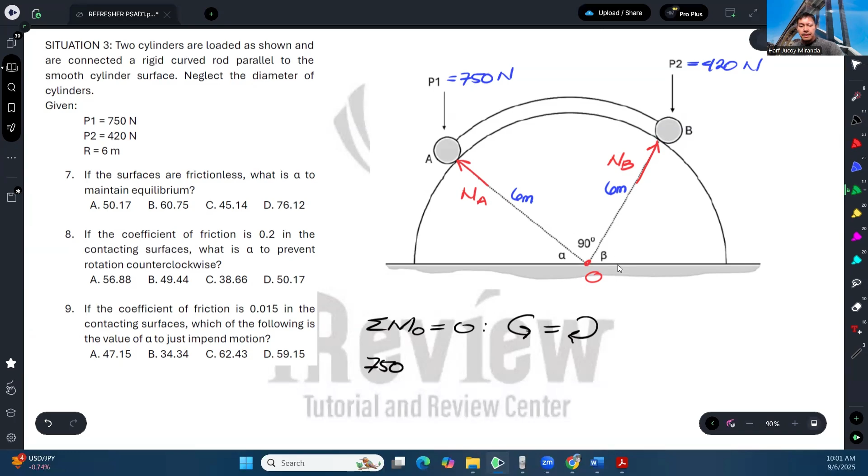If you consider this triangle, this is actually 6 cosine alpha. So that is its moment arm, and its rotation is counterclockwise, which is what it counters here.

Then, NA will no longer have a rotation about point O. That's why I strategically chose point O as the point of rotation, since NA will pass through that center, so it has no moment when we take moments there. The same applies to NB.

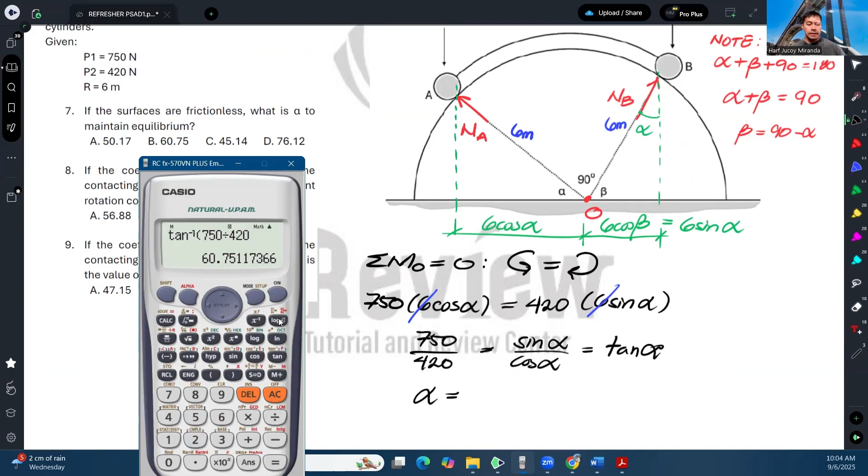So how do we do it? I'll divide this by 420, then move the cosine to the other side, giving us tangent. To solve for alpha, we just take the arctangent. Arctangent of 750 over 420 gives us 60.75 degrees.

That is already our answer for number 7.

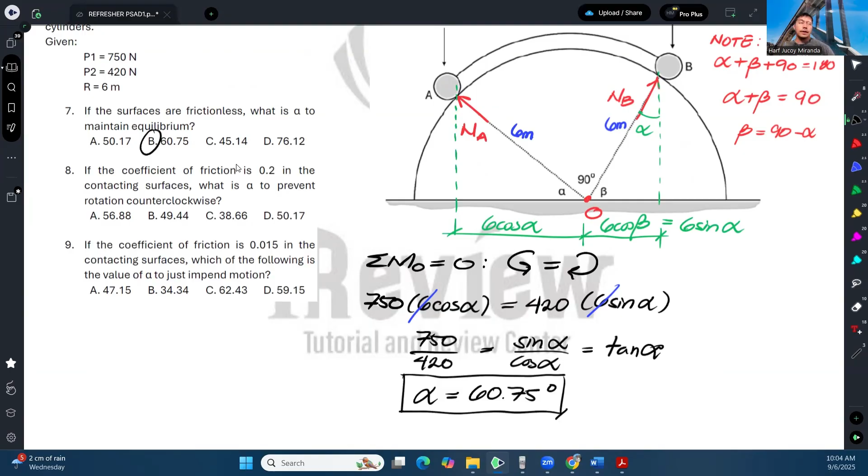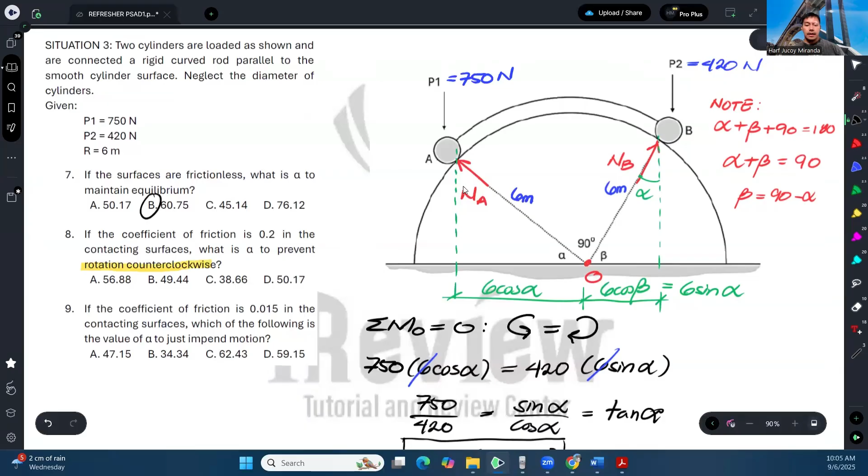For number 8, if the coefficient of friction is 0.2 at the contacting surfaces, what is alpha to prevent counterclockwise rotation? Now there's friction involved, so I'll repeat the drawing, but this time considering friction. This is for number 8.

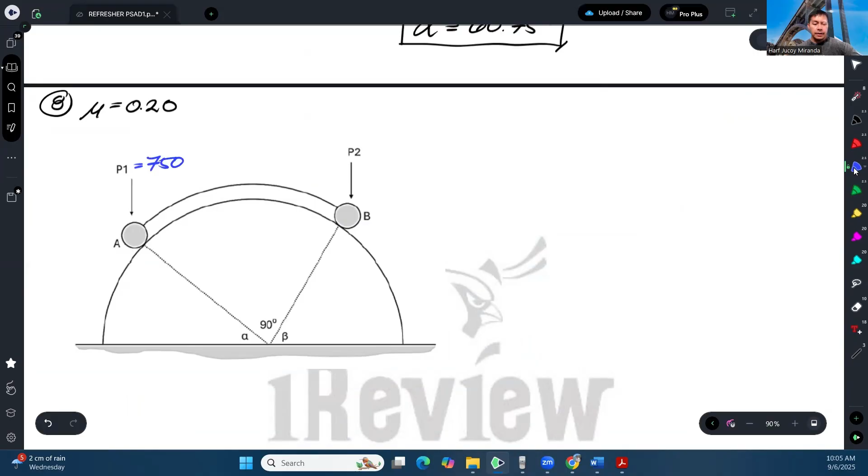For number 8, the coefficient of friction is 0.2. Now, when we draw the free body diagram again, we have 750 and 420.

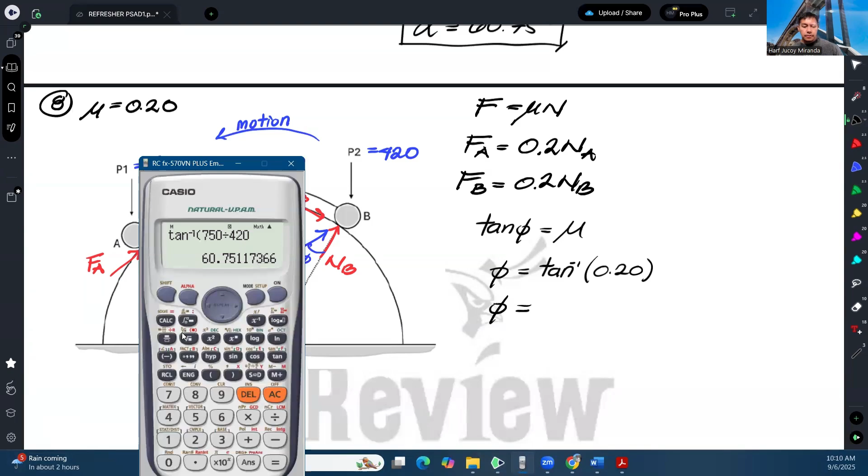So the next thing we'll do to solve for RA and RB is to combine them all together. Or you can apply summation of forces vertical and summation of forces horizontal - that works too. But to simplify, let's make a force triangle instead.

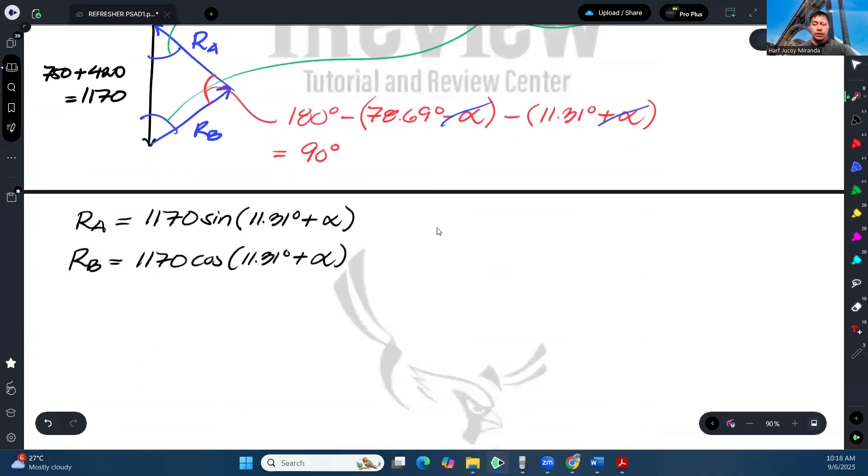Okay? So now let's proceed to taking summation of moment about point O. Assume ko na lang na counterclockwise is positive. Okay? So para lang malinaw, let me just redraw that ulit. So para hindi nakakalito, no?

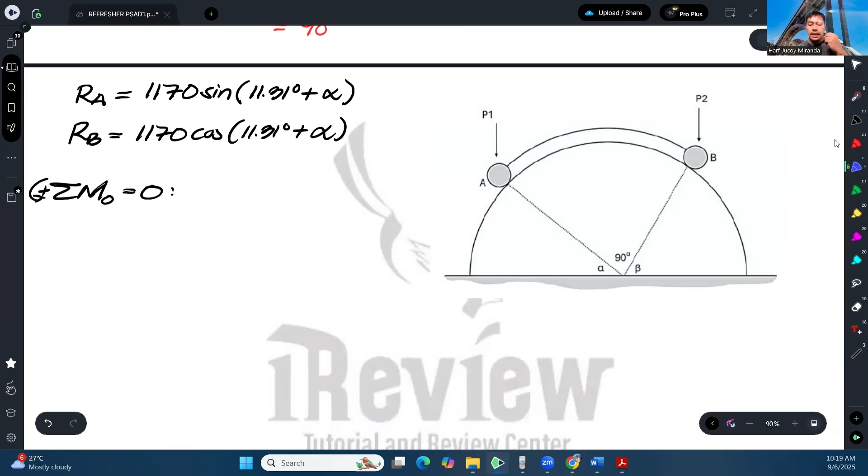Okay, so once again, we already determined that ito 750, this is 420. Tapos we already replace yung mga forces dito ng ganito na lang, RA. Tapos dito naman, ganito. RB, no? Tapos ito yung phi. So phi, okay? So ngayon, pag nag-moment tayo sa point O, unahin ko muna

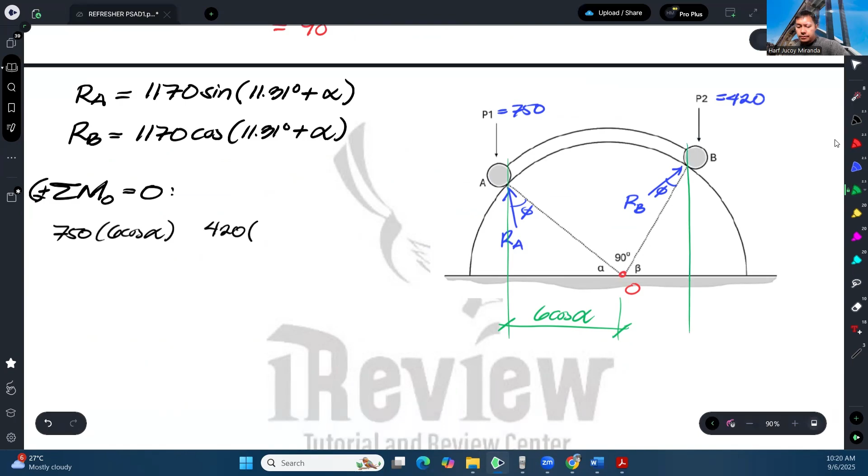yung 750 tsaka 420. So yung 750, ang magiging moment arm niya, kagaya lang kanina, ito, na 6 cosine alpha. Okay, counterclockwise. Tapos yung 420 naman, ang magiging moment arm niya, ito naman, which we already recognize to be 6 sine alpha. Tapos clockwise yan.

Tapos yung RA na to, kailangan natin i-component, di ba? So meron siyang X component or meron siyang component dito, tapos meron din siyang component dito. Bali ganito yung components niya, di ba? So yung component niya dito, wala nang moment yan. Kasi zero, dadaan lang siya doon sa point of rotation. Ang meron na lang siyang rotation is itong component na to.

Lipat ko dito ha, yung component na yun. And that component is RA sine of phi. Di ba? So ganun din dito sa B, meron siyang component. So yung component, ilipat natin dito. So ito yun. And that is RB, again, sine of phi. Okay? So yun lang yung iikot.

Now, again, yung component nila dito, walang moment sa O. Alright, so lagay natin. So unahin ko yung RA. So RA, sine of phi, which is 11.31, lagyan ko na, degrees. Ang magiging moment arm nito is yung radius mismo. So times 6. Tapos ang rotation na ipoproduce nito, clockwise, so negative.

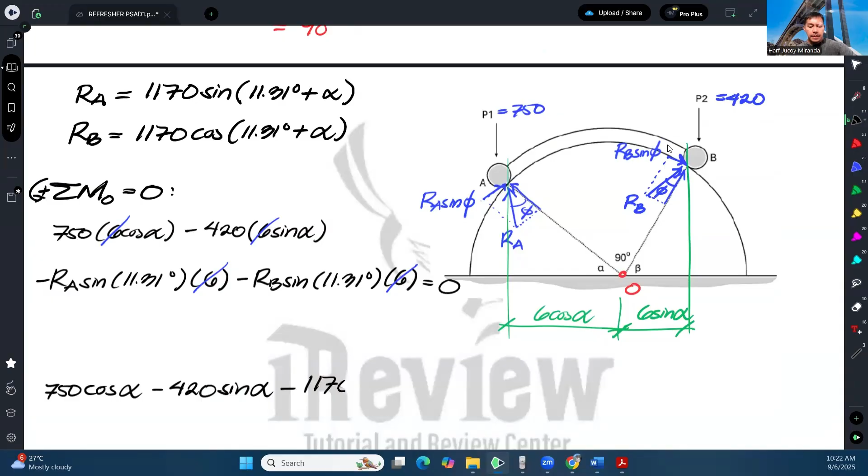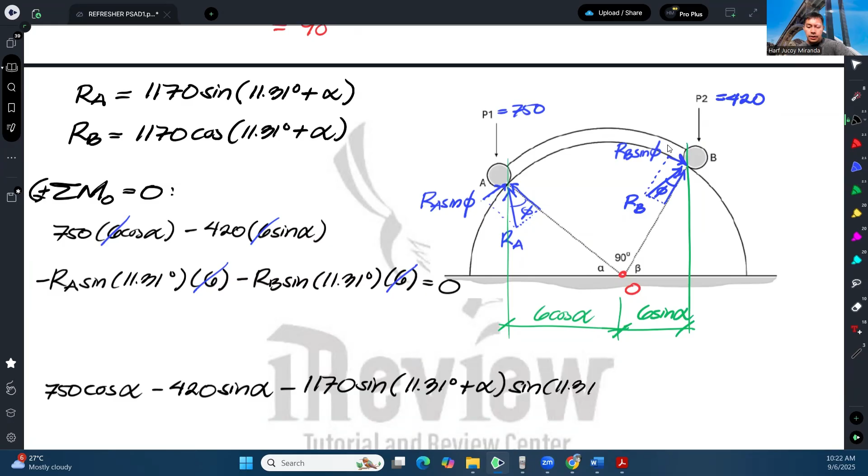Ano nga ulit yung RA? Ito. 1170 sine of 11.31 degrees plus alpha, yan yung RA, times sine of 11.31 degrees. Ganyan, no? And then minus RB. Ano naman yung RB? So ito naman, no? So 1170 cosine of 11.31 degrees plus alpha times sine of 11.31.

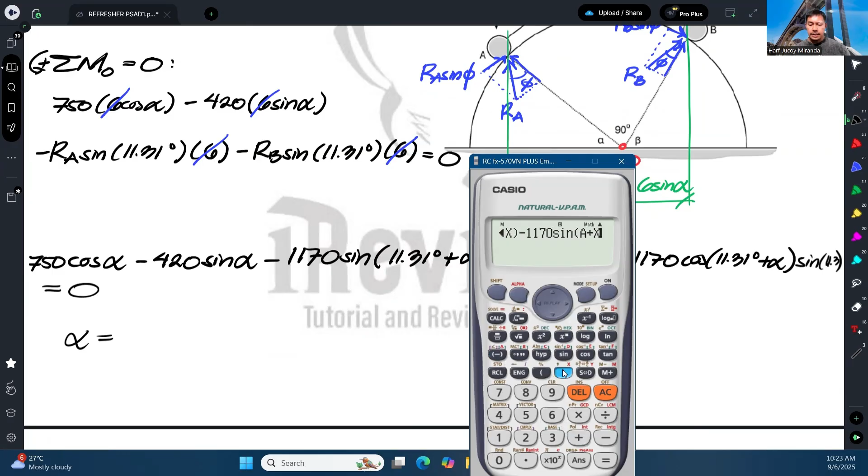Okay? So yan. And that is all equal to 0. Okay? And from there, we can now solve for alpha. Okay? So double check ko lang. Andito ko nilagay yung 11.31. Okay? Para lang hindi mahaba. 750 cosine x minus 420 sine x minus 1170 sine of yung 11.31 plus x times sine of 11.31 minus 1170 cosine of 11.31 plus alpha times sine of 11.31. And that is all equal to 0. Solve for alpha.

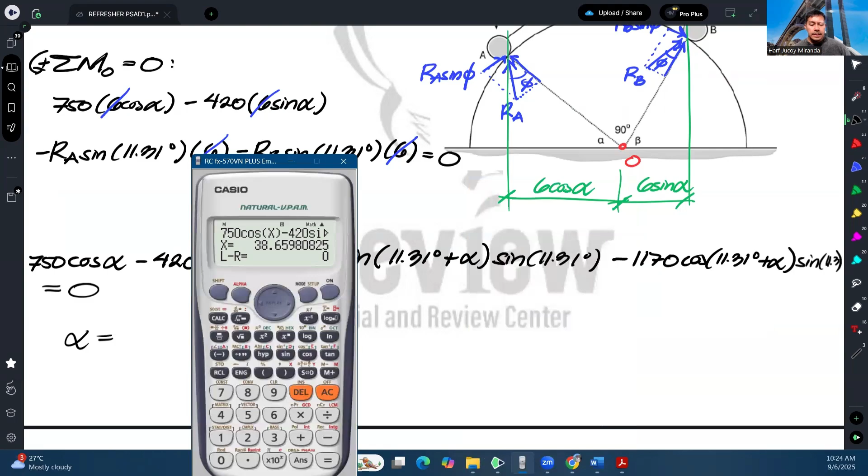So alpha gives us 38.66 degrees. So that is the minimum.

Okay, angle so that there will be a rotation counterclockwise. And that is going to be our answer here, letter C.

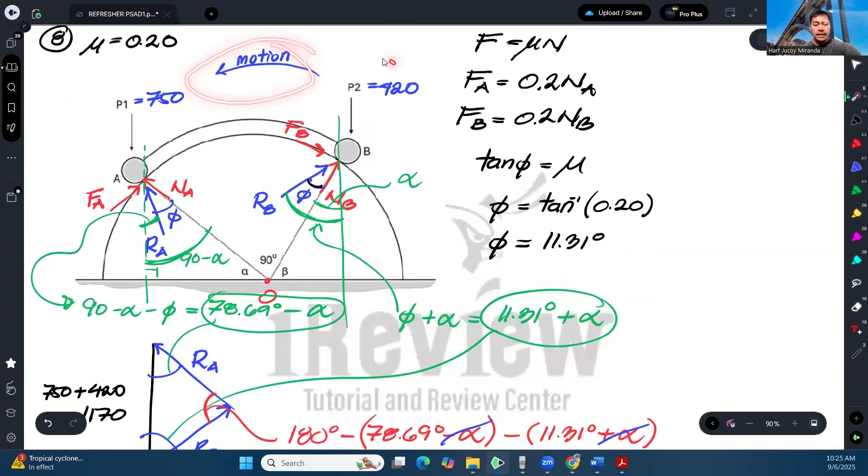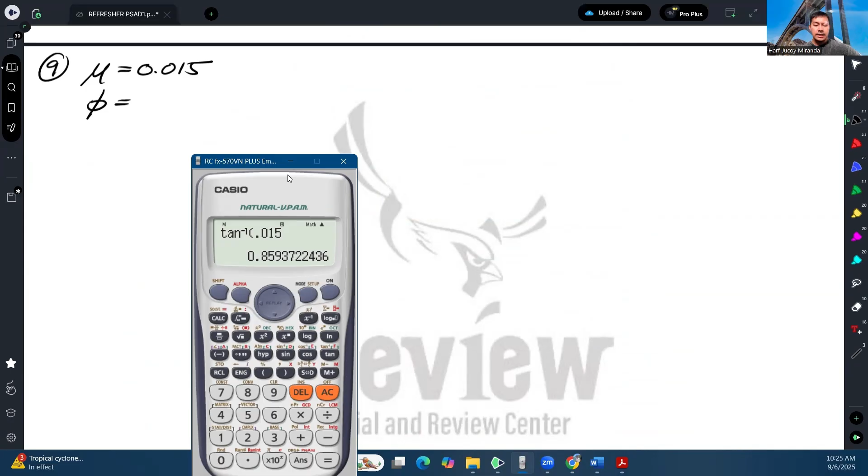So, 0.015. Let's get the angle of friction right away. Arc tangent of 0.015. So it's small, 0.86 degrees. I'll store that in A.

Okay, so now we need to check two things, right? Suppose our impending motion is counterclockwise. Counterclockwise, impending motion.

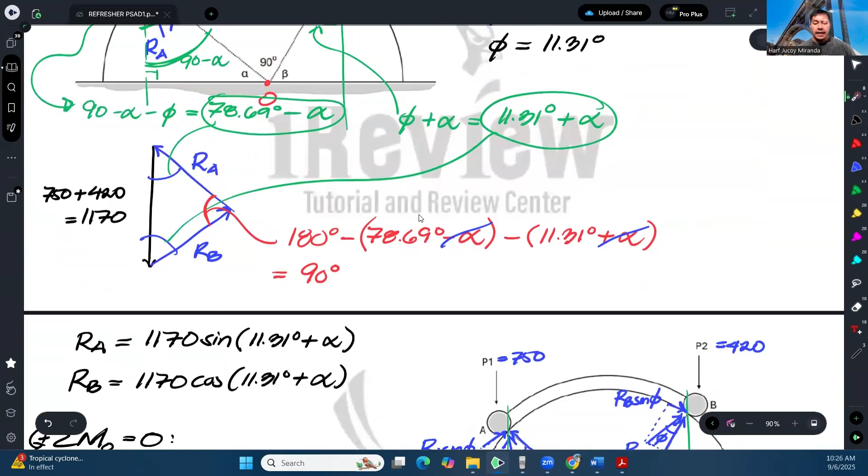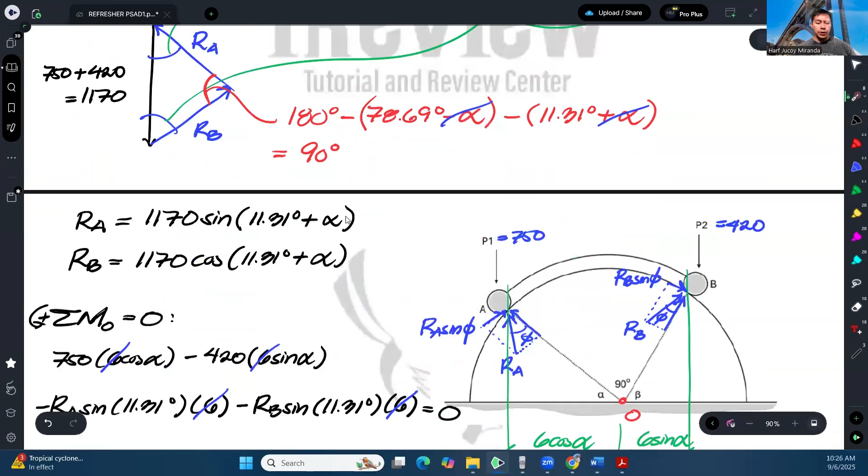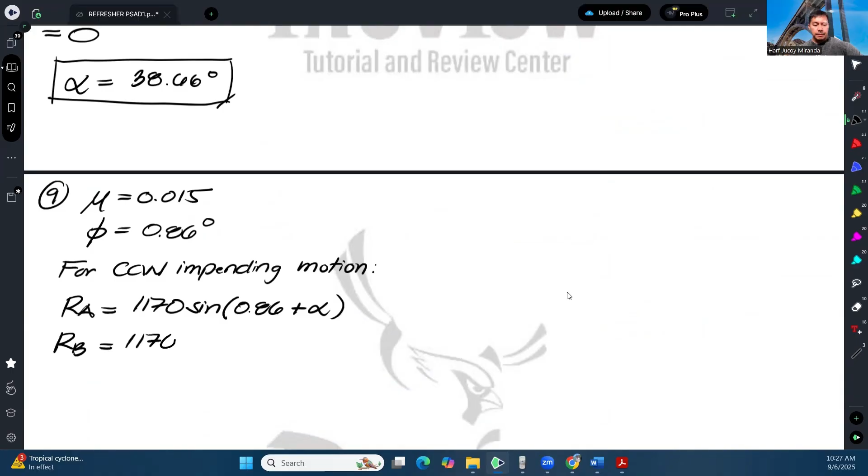It becomes this, so let me write it down. RA is 1170 sine of 0.86 plus alpha. And then RB is 1170 cosine of 0.86 plus alpha.

Okay, then when we take moments about point O, it's still all the same, only this part changes. I'll just write here: taking summation of moment about O, we will have the same exact equation.

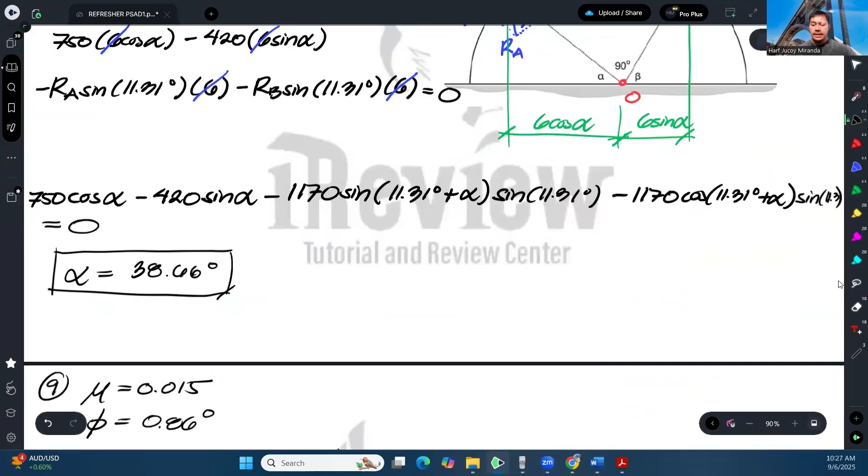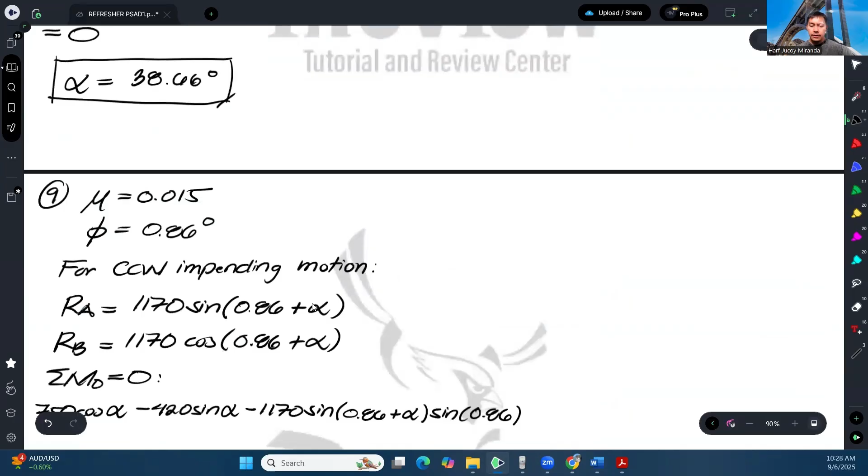So: 750 cosine alpha minus 420 sine alpha minus 1170 sine of, this time, 0.86 plus alpha, times sine of 0.86, minus 1170 cosine of 0.86 plus alpha times sine of 0.86, all equal to 0.

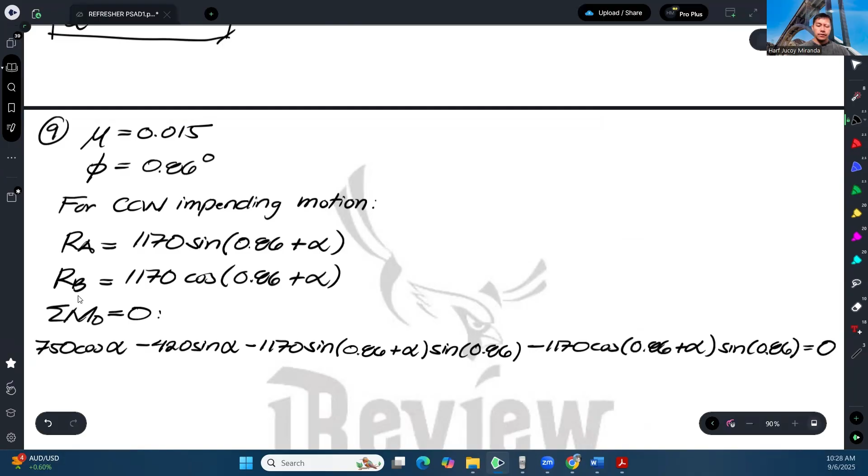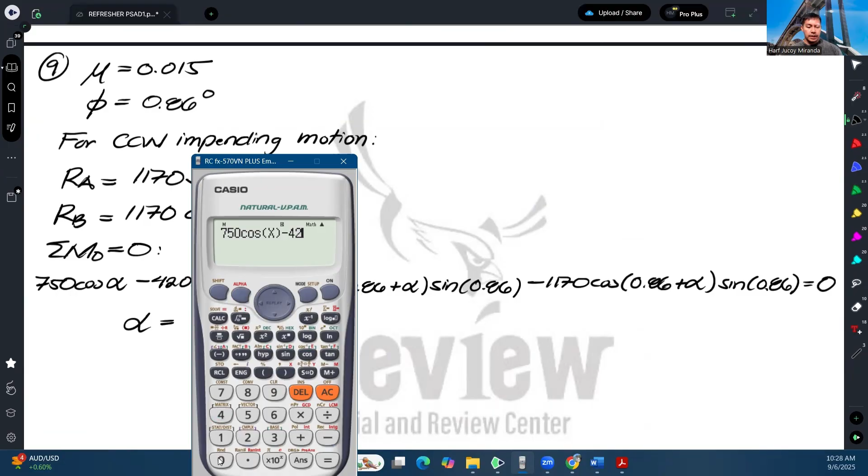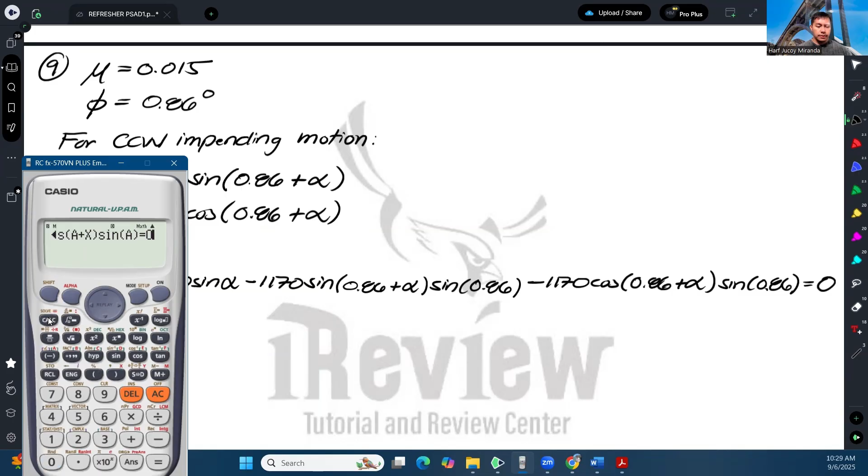And from here we can solve for alpha when our impending motion is counterclockwise. So: 750 cosine alpha minus 420 sine alpha minus 1170 sine of 0.86, which I stored in A, sine of A, minus 1170 cosine of A plus X times sine of A, all equal to 0. Okay, so this gives us 59.15 degrees.

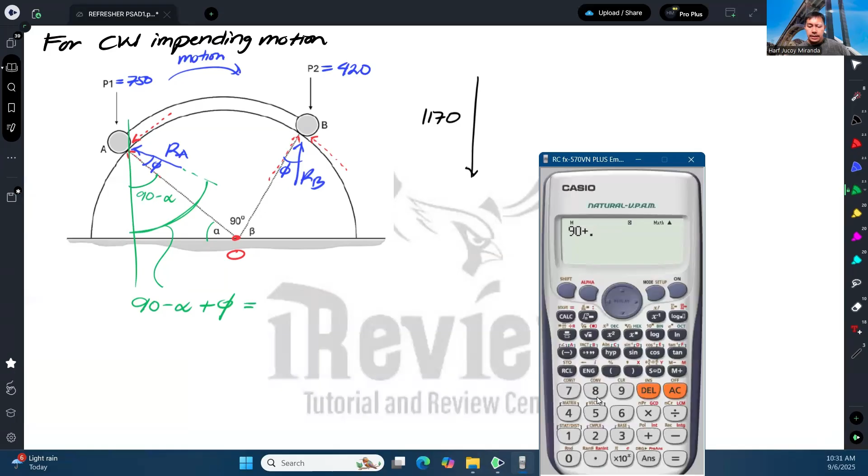Okay, so we know again that this is alpha, so this is 90 minus alpha. That means the angle of RA from the vertical is this, which is 90 minus alpha plus phi. So meaning, when we compute that, we know phi is 0.86, so it becomes 90 plus 0.86, which I put here: 90.86.

90.86 minus alpha. And when we do the same for RB, that's it. So the angle we're looking for with respect to vertical is this.